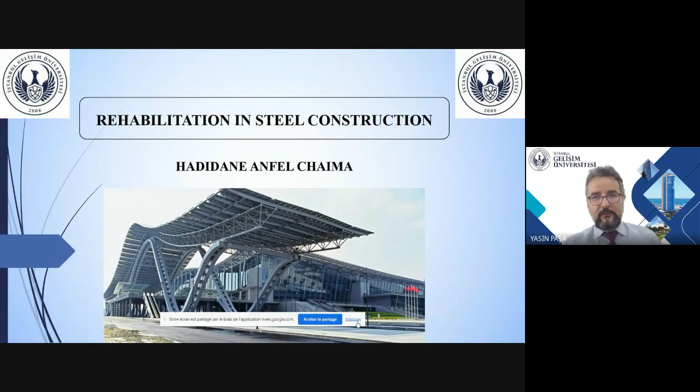In today's subject, I chose rehabilitation in steel construction. My table of contents is going to be as follows. First, we're going to start with a general introduction about rehabilitation and generally in steel construction. And then we're going to get to the challenges faced during steel rehabilitation. After that, there's the advantages of steel rehabilitation over complete replacement, the methods used in steel rehabilitation, inspection and assessment before choosing a method, which is a really critical point in rehabilitation.

And then the potential risks associated with working on existing structures, with steel or concrete. They both have really high risks. We're going to talk a little bit about that. And then we're going to get to the future and the new trends that can help with this kind of research, which is rehabilitation. After that, I'm going to conclude with a general conclusion.

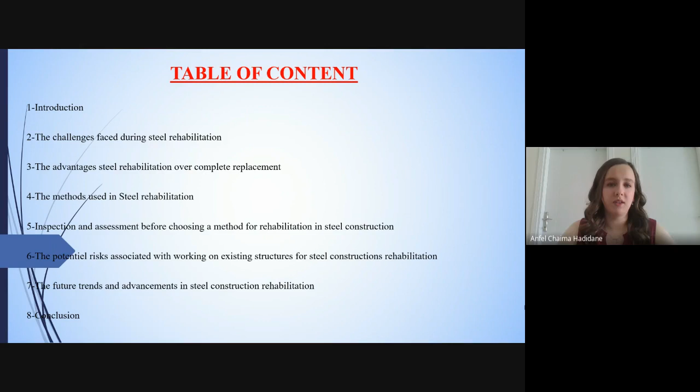As an introduction, rehabilitation in steel construction is a vital process that involves restoring, strengthening, and upgrading existing steel structures to ensure their continued safety, functionality, and also longevity. Steel structures, renowned for their strength, durability, and versatility, are widely used in various industries, including bridges, buildings, industrial facilities, infrastructure projects.

The aim of rehabilitation in steel construction is to restore the structural integrity and functionality of steel structures that have experienced deterioration or damage. So in such cases, rehabilitation techniques play a crucial role. The field of steel structure rehabilitation is vital in maintaining the safety, reliability and longevity of our built environment.

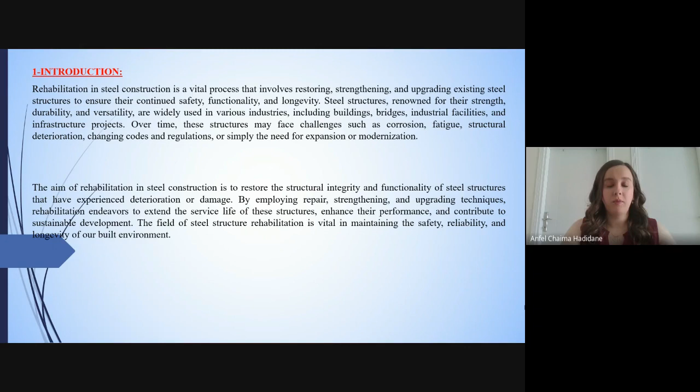We're going to first start with the challenges faced during steel rehabilitation. During steel rehabilitation, several challenges may arise that require careful consideration and effective problem solving. These challenges include a lot of things, starting with structural assessment. Conducting a comprehensive and accurate assessment of the existing structure is crucial, and it can be challenging because it may involve investigating hidden or hard-to-access areas, identifying the extent of any kind of damage.

Secondly, the compatibility of materials. Ensuring good compatibility of new materials and systems with the existing steel structure can be challenging. The compatibility of different steel grades, coatings and corrosion protection systems must be carefully evaluated to prevent potential issues such as galvanic corrosion or inadequate bonding between new and existing components. Finding suitable materials that meet the structural performance requirements can be so complex.

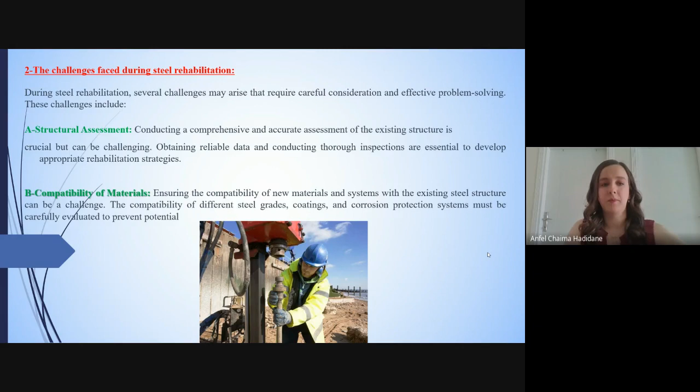Third, structural integrity and safety. Maintaining the structural integrity and ensuring the safety of the rehabilitation process are critical. Implementing safety measures and adhering to relevant standards and regulations is essential. Limited access and space constraints. Rehabilitation in existing steel structures often presents challenges related to limited access and confined spaces. Accessing certain areas for inspections, repairs, or strengthening may require specialized equipment.

Time and cost constraints. As we all know, working in rehabilitation can be a bit costly, especially with steel, which is one of the biggest problems facing steel construction in general, not only for rehabilitation. Complex engineering solutions: doing a study to rehabilitate an already existing building is challenging for any engineer in particular, because you have to really find the main problem and try fixing it.

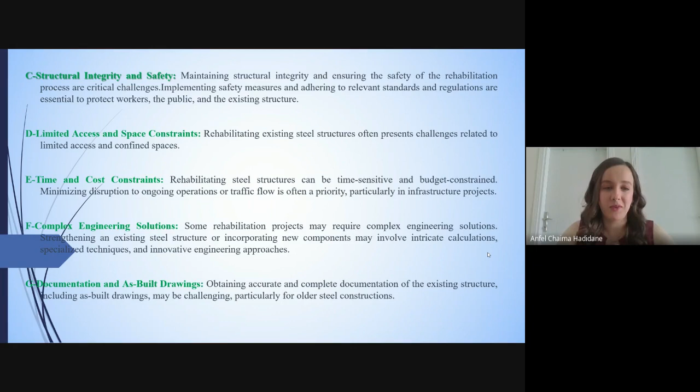And now I'm gonna talk a little bit about the advantages of steel rehabilitation over complete replacements, because there's always the solution for complete replacement. But why do we choose rehabilitation over complete replacements? So steel rehabilitation offers several advantages over complete replacement, making it the preferred choice.

And some of the advantages are cost effectiveness. Well, as I said earlier, cost and financials in doing rehabilitation or a new building is a really challenging topic, and some might say it's not the most important thing, but it is so important. So working on an existing building can be less costly than doing a new building from scratch.

Other components are still in good condition. We don't have to replace them. So this reduces the overall construction cost by minimizing the need for new materials and labor-intensive demolition. Additionally, rehabilitation projects can be completed in shorter time frames, resulting in further cost savings. So by that, we are gaining money and time at the same time.

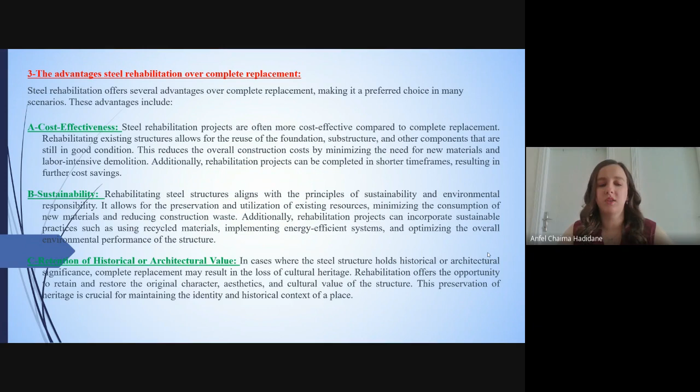Also, improved structural performance. So, through rehabilitation, existing steel structures can be upgraded and strengthened to meet modern performance requirements. This can include enhancing the load carrying capacity, improving resistance to seismic forces, or incorporating new technologies to enhance functionality.

The methods used in steel rehabilitation. As I mentioned earlier, there are a lot of methods to start a rehabilitation project in steel construction. So choosing the correct method for that specific structure or building can be a bit challenging. So if we get to know the various methods, that can help us choose the correct method.

Well, I'll start with the first method, which is repair and replacement. So this method involves repairing or replacing individual components of steel structures that have experienced localized damage or deterioration. It may include removing corroded sections, patching or welding damaged areas, or replacing severely compromised members.

As you can see, I gave you the example of the Brooklyn Bridge rehabilitation that was done in New York. So, this bridge underwent a major rehabilitation project to address structural deficiencies. Damaged steel elements such as truss members and suspension cables were repaired or replaced to ensure the bridge's continued structural integrity and functionality.

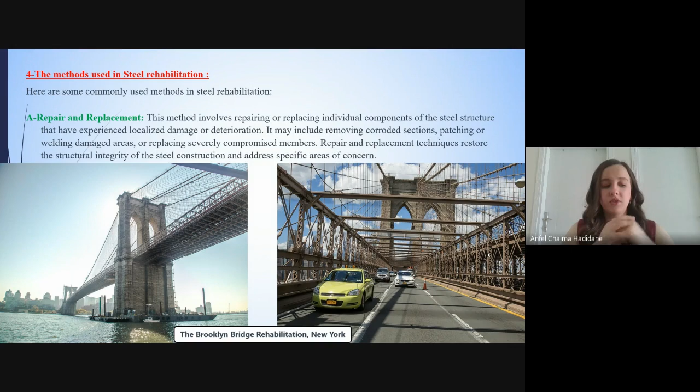The second method is strengthening, which depends on adding to the already existing members, not replacing. And this method has a lot of methods. We can do strengthening by so many methods. I'll start with the first one, which is adding reinforcements. So additional steel elements such as plates, angles or sections can be added to strengthen the existing members. These reinforcements may be bolted, welded, or bonded to the original structure, increasing its capacity to resist loads.

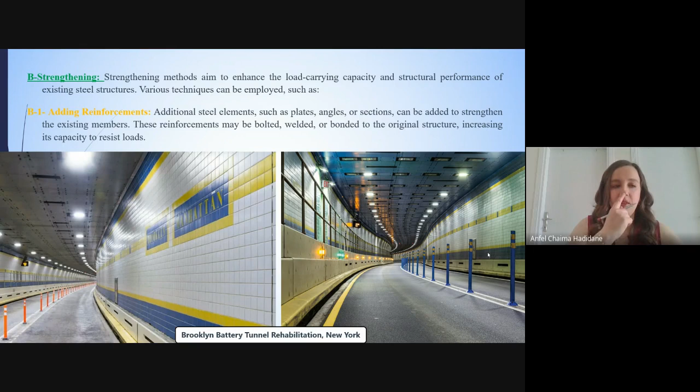As a real life example, I gave you the Brooklyn Battery Tunnel rehabilitation that was done in New York. So this tunnel underwent a rehabilitation project to strengthen its structural capacity. As part of the project, additional steel reinforcements were added to the walls and the roof, strengthening those elements. And the reinforcements enhanced the tunnel's resistance to potential impacts and increased its load carrying capacity.

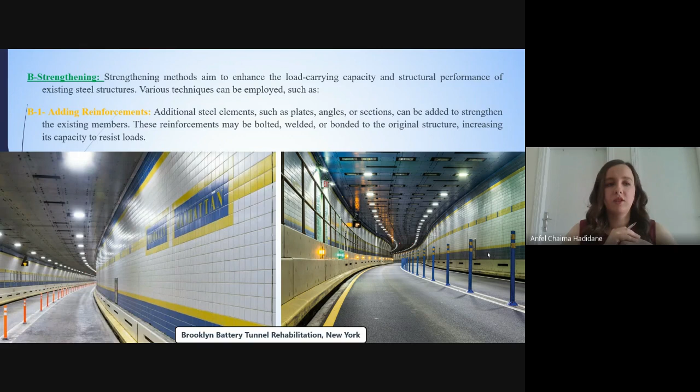Third of all, external post tensioning. It is pretty similar to pre-tensioned concrete. It's basically the same thing. It's pre-tensioning with cables. Mostly it's done in big bridges. I gave you the example of Sydney Harbour Bridge in Australia.

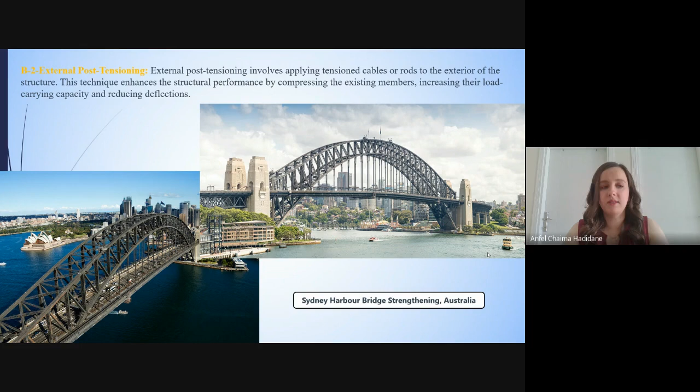So this bridge, to accommodate increased traffic loads, because when it was built before the city of Sydney was not that crowded. And with the increase of population in Sydney, they needed to increase the capacity of the bridge without having to do a new bridge. That's why the Sydney Harbour Bridge underwent a strengthening project. External post tensioning was employed, where tension steel cables were added to the bridge's arches, enhancing its load carrying capacity and reducing deflections.

The fiber reinforced polymer, FRP: a lot of research has been done on FRP because it's the new trend, we can say. So FRP composites such as carbon or glass fibers can be wrapped around existing steel members to enhance their strength and stiffness. FRP wrapping is a lightweight and corrosion resistant method that is effective in increasing the flexural and shear capacities of the structure.

A project that had FRP in its rehabilitation is the CN Tower rehabilitation that was done in Toronto, Canada. So this tower, which is an iconic steel communication and observation tower, underwent a rehabilitation project to address corrosion and enhance its structural performance. As part of the project, FRP wrapping was used to reinforce the tower steel members such as the main antenna mast, and the FRP wrapping provided additional strength and durability to the steel structure while mitigating the effects of corrosion.

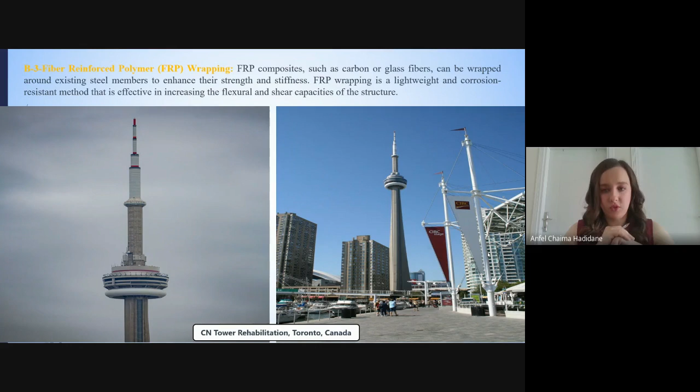Steel plate bonding, we're still in the strengthening methods. This technique involves bonding steel plates to the existing members using epoxy adhesives. So steel plate bonding enhances the strength and stiffness of the structure, and can be used for both flexural and shear strengthening.

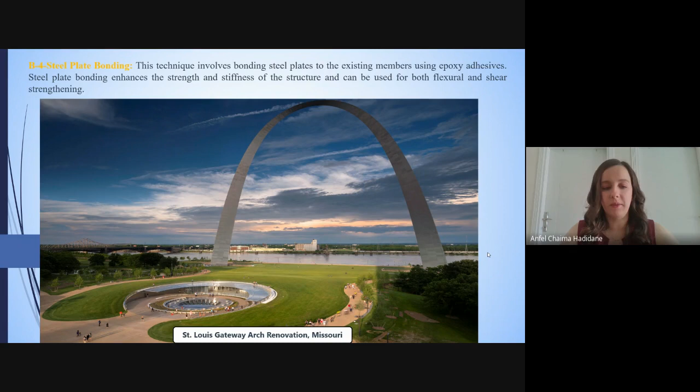Next is rehabilitation coatings. Applying specialized coating to the steel structures is a common method to combat corrosion and extend the service life of the construction. As we all know, corrosion is one of the main problems a steel construction can face. So doing its rehabilitation is a must in steel constructions.

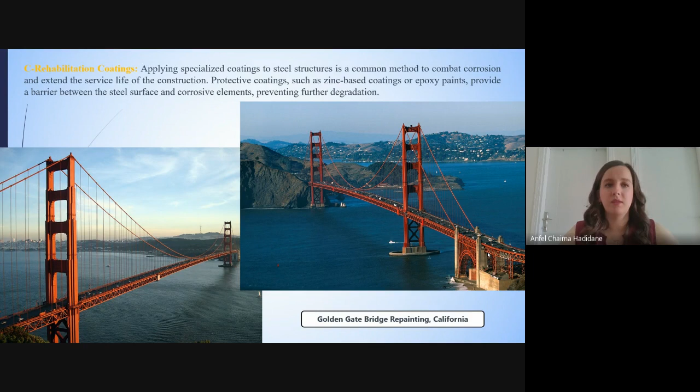So, given the example of the really famous Golden Gate Bridge in California, specifically San Francisco, the Golden Gate underwent rehabilitation works. This steel suspension bridge undergoes periodic repainting to protect its steel surface from corrosion. Specialized coatings, including zinc-based primers and epoxy paints, are applied to maintain the bridge's iconic appearance.

Corrosion protection. As I mentioned, corrosion is a big challenge facing steel constructions. Even for normal structures it is a challenge, and it is a big concern for any engineer working in steel construction, especially with rehabilitating steel constructions, because corrosion can be particularly a big problem in harsh environments. Various corrosion protection methods can be employed, including cathodic protection, which involves the use of impressed current to prevent corrosion. Additionally, corrosion inhibitors or rust converters can be applied to mitigate existing corrosion and protect steel surfaces.

Given the example of the offshore platform corrosion protection in the North Sea, as you can see, it's literally in the middle of the sea. These offshore platforms are usually exposed to really harsh marine environments, making corrosion protection crucial. Corrosion happens in a really short period of time. So in numerous projects, corrosion protection measures such as cathodic protection systems are implemented on these structures. These measures protect the steel structure from corrosion caused by salt water and other corrosive agents, extending the service life of the platform.

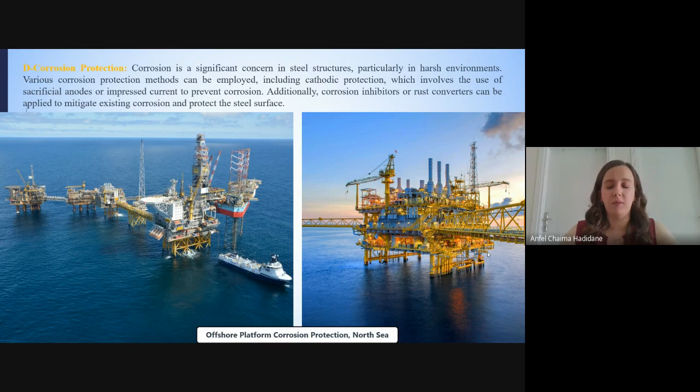Also, one of the strengthening methods is upgrading and modernization. Sometimes when you do a rehabilitation to an existing structure, it's not always a problem with the resistance. Sometimes you want the structure to have a new design which goes with modern times. So steel rehabilitation includes upgrading existing structures to meet changing design standards, codes, or functional requirements.

Given the example of the London Bridge station redevelopment in the UK, this underwent a significant modernization and expansion project to improve its capacity and functionality. The project involved the upgrading and modernization of steel structures, including platforms, canopies, and pedestrian bridges.

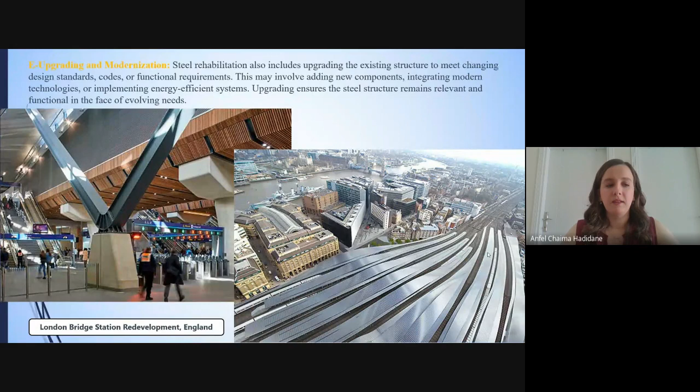Last but not least, monitoring and maintenance. This is one of the methods for strengthening. Implementing a robust monitoring and maintenance program is essential for the long-term performance of rehabilitated steel structures. This can involve regular inspections, non-destructive testing, and structural health monitoring to detect potential issues.

Given the example of the Forth Bridge maintenance that was done in Scotland, this bridge is a historical steel railway bridge which is regularly monitored and maintained to ensure its structural integrity. Non-destructive testing methods such as ultrasonic inspection and visual inspections are carried out to detect any signs of deterioration or defects in the steel members, enabling timely maintenance interventions.

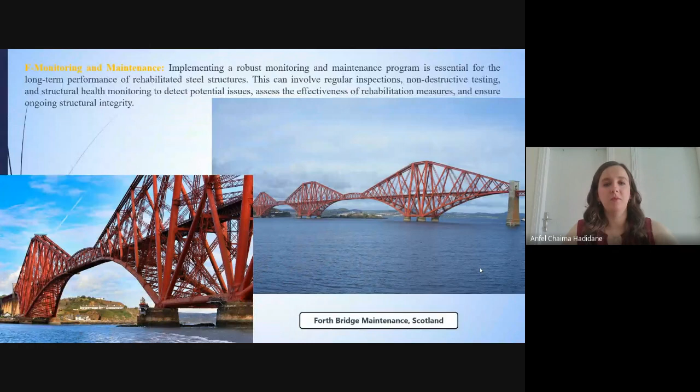Well, before choosing one of the methods that I've mentioned earlier, before choosing a specific method, you have to do a lot of inspection and assessment before really deciding which way you're gonna go with this or any specific structure or construction. So, starting with that, one of the points that you have to go by before choosing a method is identifying structural deficiencies.

So, a comprehensive inspection allows for the identification and evaluation of structural deficiencies in the steel structure or any kind of structure, actually. So this includes identifying areas of corrosion, fatigue, material degradation, cracking, and other forms of damage or deterioration. So this assessment helps to determine the extent and severity of these deficiencies, providing a clear understanding of the structural integrity and performance limitations.

Second of all, understanding load and environmental conditions. So understanding the capacity that your structure has to tolerate helps you with which method you're going to go with, whether it's FRP or adding new elements, like replacing those elements. So it depends on the capacity.

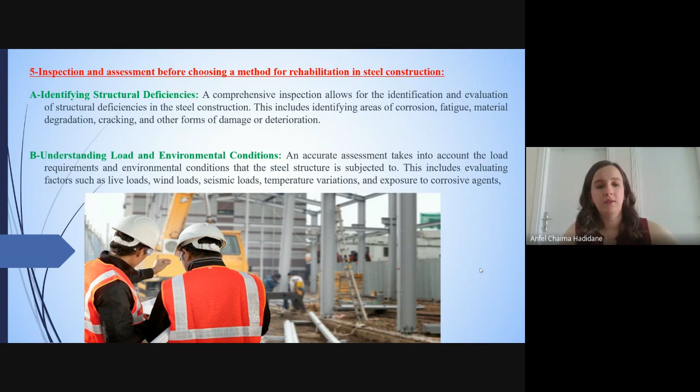Well, at the same time, considering safety and code compliance, thorough inspection and assessment play a vital role in ensuring the safety of the structure and its occupants. By identifying structural weaknesses and deficiencies, it becomes possible to address potential safety hazards and non-compliance issues.

Determining feasibility and cost effectiveness. So, a detailed assessment enables the evaluation of various rehabilitation options in terms of feasibility and cost effectiveness. It helps to determine whether repair, replacement, strengthening or other methods are suitable for this structure. So thorough inspection and assessment allow for a comprehensive understanding of the project scope, potential challenges, and associated costs.

Optimizing long-term performance. So, actually, proper inspection and assessment provide valuable insights into the long-term performance requirements of the structure. This includes considering factors such as future anticipated loads. Like right now, it tolerates this amount of load, but in the future it may have to tolerate more. So when choosing a rehabilitation method, this will be taken into consideration.

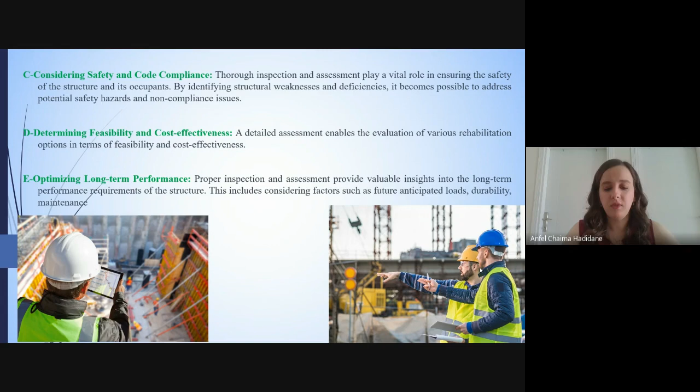The potential risks associated with working on an existing structure, whether it's steel or concrete, to be honest. When working on an existing structure, it can be very risky for anyone working on site. Even though we've studied the behavior of the structure, because it's a rehabilitation of an already existing structure, sometimes you can't expect everything. You can be faced with a lot of risks, so for people working on site, it can be a bit risky.

One of the risks is structural instability. Because it's an existing structure that needs rehabilitation, it cannot be 100% stable, and you can't really assure it being stable. Also, falls from heights can be really challenging, because when working on really high structures, falling has to be considered. So everyone should be safe and paying attention.

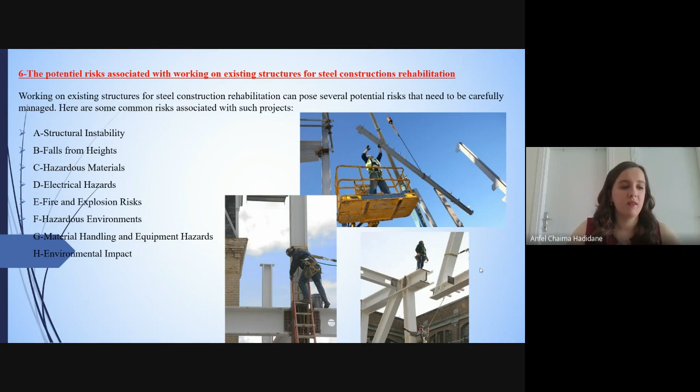Last but not least, we're going to talk a bit about future trends and advancements in the steel construction rehabilitation world. The field of steel construction is constantly evolving, and several future trends and advancements can be expected. I'm going to talk briefly about some future trends for steel rehabilitation of structures.

Starting with advanced non-destructive testing, NDT. Non-destructive testing methods such as ultrasonic testing, magnetic particle inspection, and thermography are becoming increasingly advanced. Future advancements in NDT techniques will enable more accurate and efficient detection of problems, for structural defects, corrosion, and material degradation in steel structures, allowing for targeted and effective rehabilitation of these kinds of structures.

Also, smart monitoring systems: the integration of sensor technologies and data analytics in steel structures will play a significant role in rehabilitation.

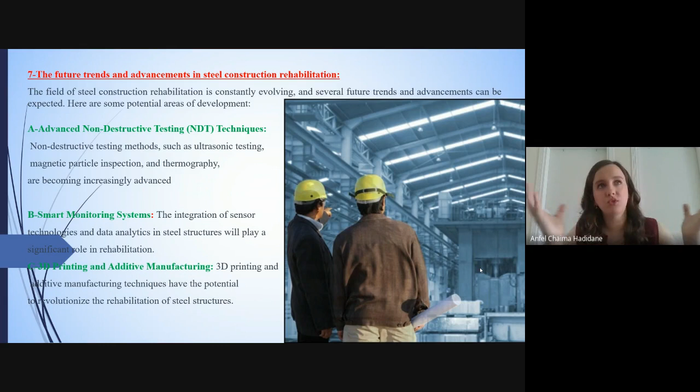Also, there's 3D printing and additive manufacturing. These techniques have the potential to revolutionize the rehabilitation of steel structures because they can be used to fabricate complex, customized, and replacement component parts with high precision and efficiency. 3D printing can also enable the integration of sensors and smart materials directly into the steel structure. If you don't have a piece, a 3D printer can help make that piece real, and you can simply add it to the existing structure without having to add a lot of elements.

Sustainable rehabilitation solutions: the focus on sustainability and environmental responsibility will continue to shape the future of steel rehabilitation.

Strengthening and retrofitting techniques: new methods for strengthening and retrofitting steel structures will emerge, catering to specific needs and challenges. Innovations may include advanced composite materials like FRP, which we talked about earlier, also carbon nanotubes or graphene that offer superior strength-to-weight ratio and corrosion resistance.

Robotic and automated rehabilitation processes. This particular method will help us have automation that will play a significant role in construction rehabilitation, enabling safer and more efficient processes.

Building Information Modeling, BIM, integration: the integration of BIM technology will streamline the entire rehabilitation process, from design and planning to construction and maintenance. BIM enables better collaboration, visualization, and analysis of rehabilitation projects, improving efficiency, accuracy, and communication among stakeholders.

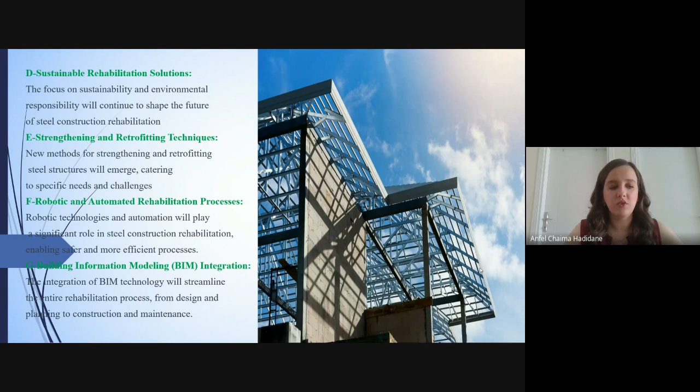Finally, these future trends and advancements in steel rehabilitation construction aim to enhance safety, durability, efficiency, and sustainability by embracing new technologies and approaches. The industry can deliver more effective and innovative solutions to address the challenges of rehabilitating existing steel constructions.

We got into our conclusion. Rehabilitation in steel construction can involve restoring, repairing, and upgrading existing steel buildings and infrastructures. Rehabilitation in steel construction is vital for ensuring the safety, functionality, and longevity of steel structures.

Challenges during steel rehabilitation include assessment, compatibility of materials, structural integrity, and safety, limited access and space constraints, time and cost constraints, complex engineering solutions, and lack of documentation.

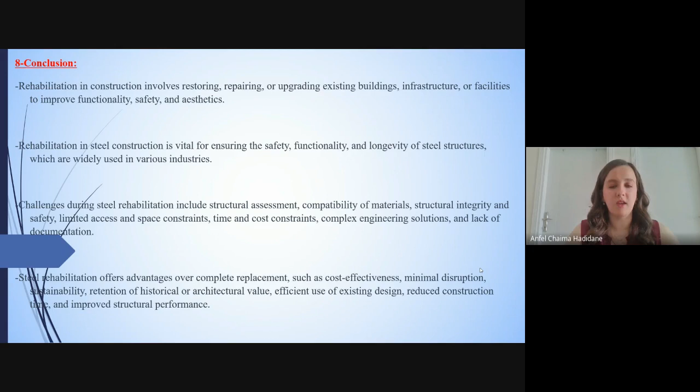Common methods used in steel rehabilitation include repair, replacement, and strengthening. Thorough inspection and assessment are crucial before choosing a rehabilitation method, as they help identify structural deficiencies, understand load and environmental conditions, ensure safety and code compliance, and determine feasibility and cost effectiveness.

Potential risks are associated with working on existing structures. This is inevitable, but if correct measures are taken, we can assure a safe working environment for workers in general.

In summary, I believe steel rehabilitation is essential for sustainable infrastructure and development, as it promotes resource conservation, reduces environmental impacts, minimizes waste, improves energy efficiency, preserves cultural heritage, provides economic benefits, and enhances resilience.

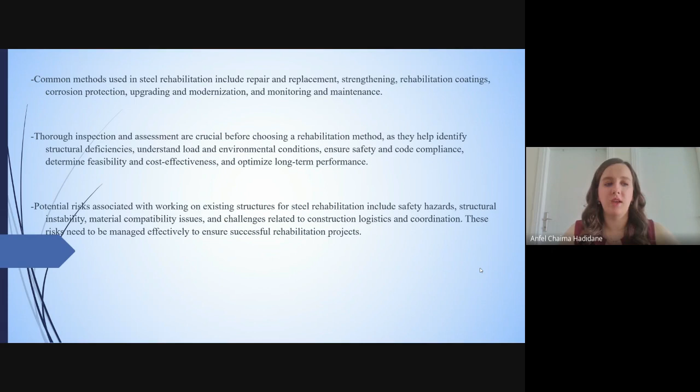In the end, by investing in the rehabilitation of existing structures, especially steel, communities can achieve their infrastructure goals while minimizing the ecological footprint and contributing to a more sustainable future. Thank you for listening, everyone.